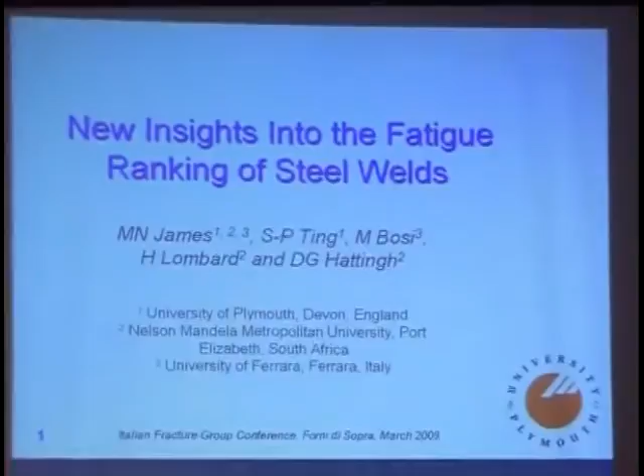It's trying to address a question I raised yesterday about structures, particularly steel structures. We have a lot of continuum mechanics solutions for predicting fatigue life, which all work to a greater or lesser extent. For some time it seemed to me one reason they don't work better, allowing us to use materials closer to their particular fatigue strength parameters, is that we don't really understand the material aspects influencing fatigue. Particularly in welds, you have microstructural and heat input influences leading to microhardness gradients and residual stress gradients. So I've had a go at characterizing the residual stress and microhardness gradients for a variety of welds, to see whether one might predict the fatigue ranking of welds from aspects of microhardness and residual strain.

It turns out that you probably can, but probably my data set is not big enough. One of the difficulties of advancing fatigue life prediction is that you require large matrices of experiments, which in this particular case, residual stress measurements, tends to be very expensive. And therefore we often don't get all the data we like.

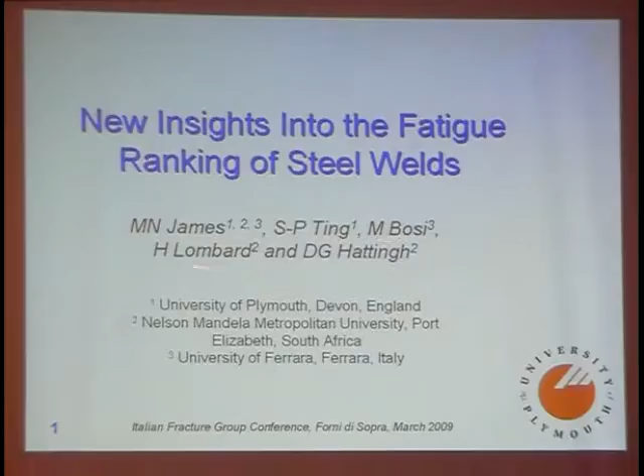My colleagues on this work, by the way, just to prove I do have an Italian connection, include Matteo Bosi, who very kindly is in the audience today and was an undergraduate student at the Università di Ferrara. You'll see that I am actually associated with Ferrara as well. Also a PhD student, Si-Pin Ting, and two colleagues in South Africa who assisted me with residual strain measurements.

So what have I done? We've had a look at parameters that might be used to predict the fatigue ranking of fusion welded high-strength steels. The background of this work was that Corus, the steel maker in the UK, now part of Tata Steel, had done some work on high-strength steels and found contradictory results for fatigue performance in terms of what they thought the residual stresses did.

They were interested in doing some residual stress measurements in these steels, so I came along and persuaded them to fund a PhD project. It turned out that the residual stress measurements they made using hole drilling and surface X-ray were not explaining the fatigue data at all.

So we're interested in understanding process property performance relationships. In welding, you've got process inputs, you use a filler metal, you use some heat, and you get a variety of induced properties. You have residual strain, dilution of the alloy in the fusion zone, a variable microstructure and a variable hardness. That makes it quite difficult to predict performance more precisely.

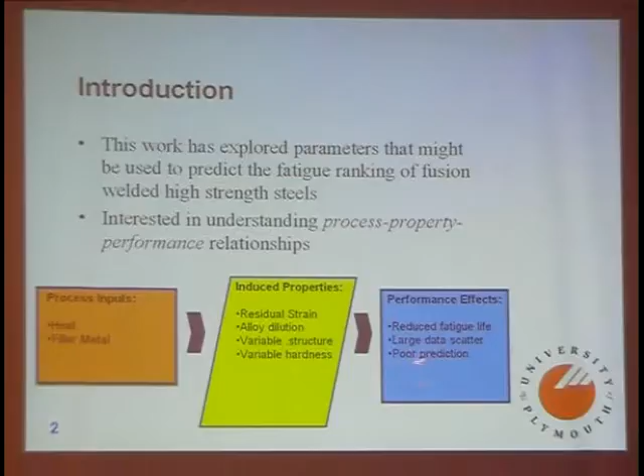What you tend to get is reduced fatigue life, large data scatter and poor predictive capability. So if we're going to advance that particular aspect, it means we do have to take some account of what welding is doing to the microstructure.

In principle, at a first order, if one understood what residual stresses and microstructural changes did to welds, you might be able to provide some advice to fabricators. This is quite useful advice if you can get around to it: should they make welds with undermatched, matched, or overmatched filler metal to get particular properties? Should they use higher heat input with fewer weld passes, or lower heat input with more weld passes? If you could even get that far, it would be quite beneficial.

Although this isn't taken account of in the fatigue design codes for welds, you often find there's a crossover in performance for two nominally similar welds. So it's worthwhile assessing life at shorter life, about 10 to the 5 cycles, and at lives longer than 2 by 10 to the 6.

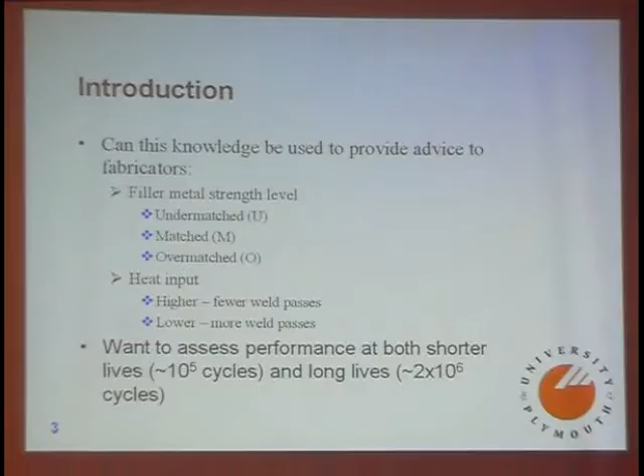You have another difficulty, of course, with longer lives in doing all the experiments needed to establish the long life region adequately. Everything has a cost, as Morris Sonsino noted yesterday, and these costs are just too high often for relatively small research projects.

This is a roller quenched and tempered steel, a high strength steel. It's called a 701 normally because it has about a 700 megapascal yield strength. Corus supplied plates 8mm and 12mm thick, and we welded together two plates a meter long by about 150mm wide using MIG welding. These plates have slightly different properties, but they are significantly higher in yield stress than the stated 700, up around 800 megapascal yield as manufactured. So these are actually high-strength steels.

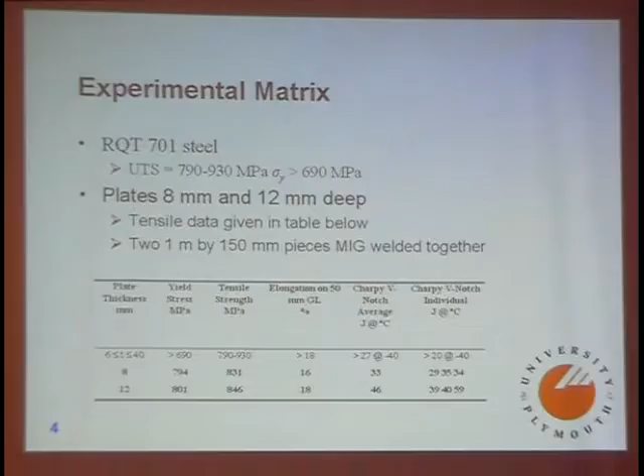We used 3 filler metals, nominally corresponding to overmatched, matched, and undermatched in the tensile properties of the actual filler metal themselves. You can see that the overmatched has a 980 yield stress as against the sort of 800 of the roller quenched and tempered steel. This is close at 700, and that is low at 500.

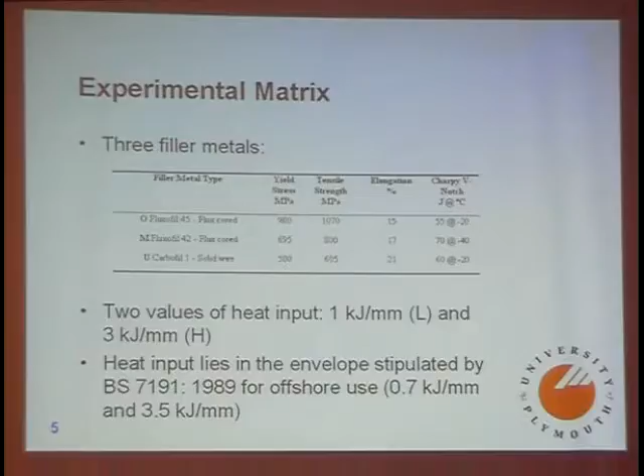We use 2 values of heat input, which lie within the envelope stipulated by a British standard for offshore use. So I've got a fairly broad experimental matrix to try, which should in principle give quite variable micro-hardness and residual strain, and does.

And so if you found a reasonable correlation across that broad range of data, you might think that you were on the right track. So when they made the welds, this is what they did.

This is 1 kilojoule per millimeter, 8mm plate, 3 passes. 1 kilojoule, 12mm plate, 7 passes. 3 kilojoules, 8mm plate, 2 passes, and in the 12mm plate, 3 passes. So we've got a matrix with 6 different weld conditions for each of the 2 thicknesses.

And as I say, that does tend to give you a good variation in hardness, residual strain, and fatigue performance. So if you can find some way of predicting the fatigue ranking, there is a sporting chance that you're getting something true.

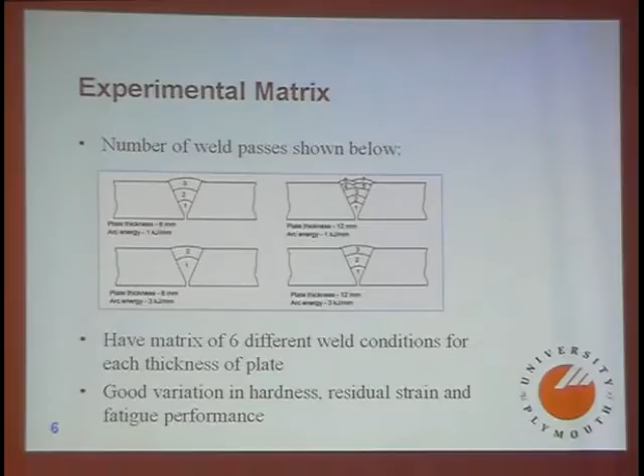So what do we do with all of this? I must say this project has taken me quite a long time to achieve. It's probably been going on for about 5 or 6 years as I steadily ironed out each of the wrinkles. In particular, the residual strain measurements are complex, expensive, and require you to put forward experiments to the Central European, well, the European facility.

You have to be careful when you say Central European. They are the Central European, but it's for the whole of the EU - central to the EU, not to Central Europe. So that is the ILL and ESRF in Grenoble.

I wanted to measure the residual strain profile transverse to the weld on lines 1mm below the toe and at mid-depth. 1mm below the toe is probably where you've got undercut intrusions and you would expect crack initiation to be occurring, or at least cracks to start growing. So that residual strain and the hardness there might indicate an effect on early crack growth.

The mid-depth one I'm sort of assuming dominates the longer crack lengths, and I was interested to see which one might work the best. So I measured residual strain along those lines and micro-hardness profile along the same lines.

I would have liked to have done a full 3D residual strain measurement and get the residual stress directly from that, but unfortunately that is just too expensive. You will not get the beam time at European facilities to do that.

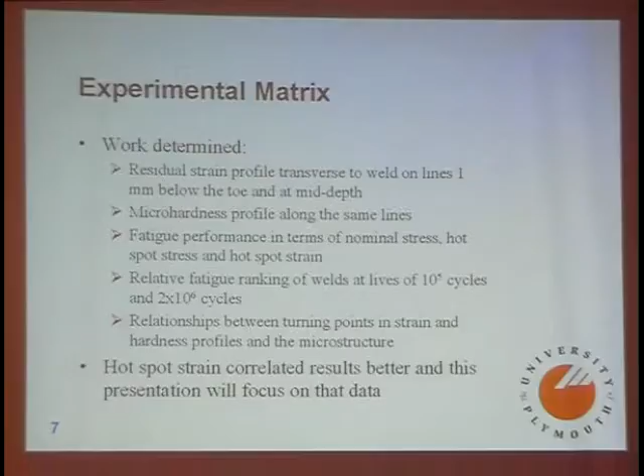So, summary of what I've said already. I'm interested to see whether some combination of residual strain and hardness information can predict the observed fatigue ranking, using things like turning point magnitudes, the range of strain and hardness excursions, gradients and their change across the weld toe, and the yield strength of the weld metal.

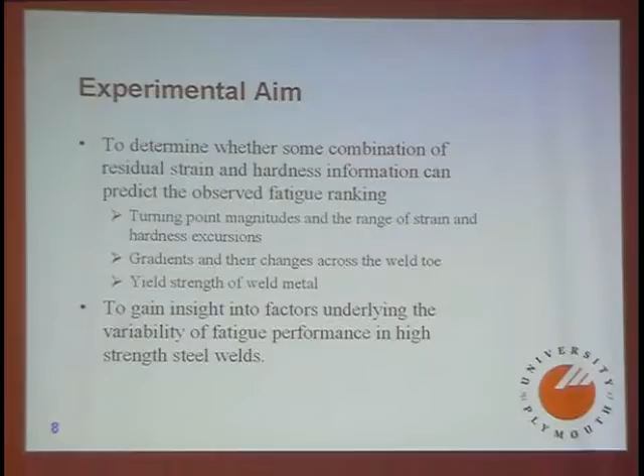But like many things in life, if you're in Korea or you're prepared to buy the equipment, you can get a map of yield strength across the weld matrix from micro hardness measurements, but sadly I don't have that, so we end up always doing a little bit of the whole story. And this is what I want to do. I would like to gain insight into factors underlying the variability of fatigue performance in high-strength steel welds.

One of the things that Corus had shown originally in previous work was that if you had the same welds fabricated by 2 or 3 people and then stress relieved as well, some of them, you ended up with completely different sets of fatigue data. And it got worse as the strength of steel went up. And so they said, we don't really know what this is.

We've done some residual stress measurements. They didn't explain this at all. They gave a counter result. And at this point I came along and said, in exchange for only a small sum of money, we can run a PhD project. This is it.

So we get these plates. These are 1 meter long by now 300 millimeters wide, and we cut them up. And again, there's always approximations to what you can do. You need a fairly big specimen to be reasonably certain that you've captured the residual strain field that is representative of the full-size plate. And so that is the residual strain specimen there. It would be nice to test fatigue specimens of the same width, but unfortunately the testing machine won't do that.

So then you figure that, well, if I keep these as 40 wide and don't change the length there, there's a sporting chance that the transverse residual strain in that direction is moderately untouched, and with any luck that will be the strain that will matter more to the weld rather than the sum of the principal strains, but you don't know the answer. So these are fatigue specimens, and that one there was used for microstructural analysis, as you might say.

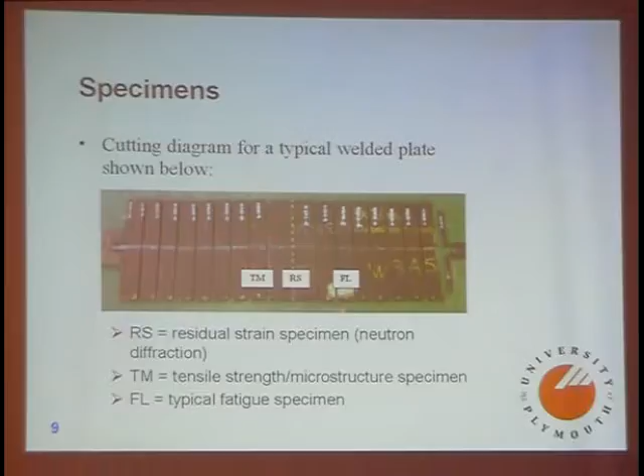So properties of interest are the hardness of the microstructure, yield strength of weld metal. They're both highly variable across the weld zone, and it's only possible with the equipment we've got to measure tensile data in the middle of the fusion zone, and you can do that with a 2.5 millimeter diameter waisted specimen. And then you can have a go at correlating the actual data with indicative filler metal properties. Just have a look at the accuracy of that tag of overmatched, matched, and undermatched filler metal. It turns out that that is not necessarily super close.

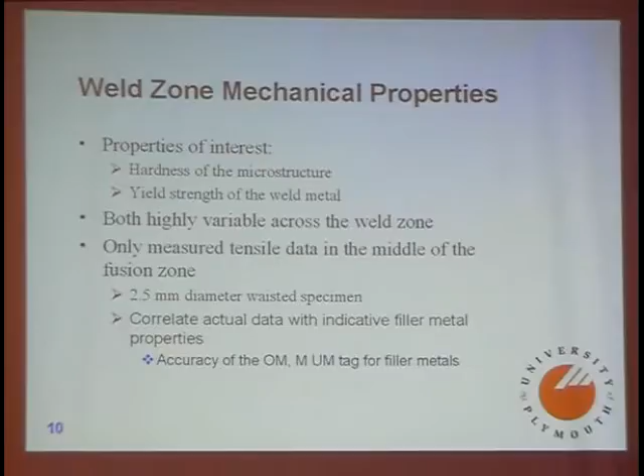So this table gives the tensile results. This is the weld process conditions, heat input, filler metal type, undermatched, matched, overmatched, plate thickness. We measured 0.1% proof strength and tensile strength.

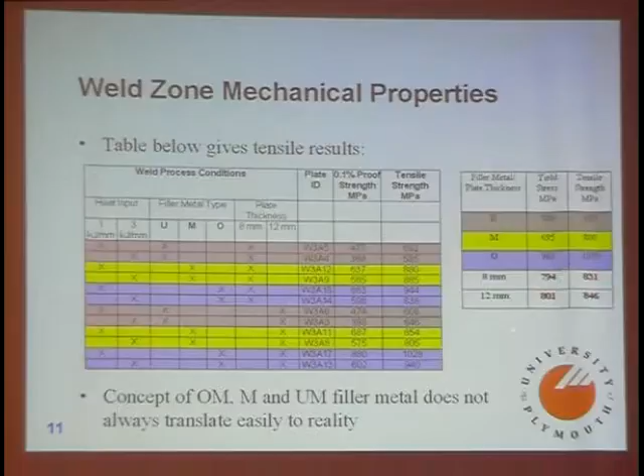This colour here, I'm not very good with colours, I'm afraid. I just choose them. I can't describe them. That colour there is undermatched, the yellow is matched, and what I think is blue is overmatched. And it shows you here the original strength of those filler metals, and there the strength of the plates. And you can then correlate those strengths with these values and those values.

So if you have a look at undermatched filler metal, you do a reasonably good job. So if you think you've made an undermatched weld, you have. Both the proof and tensile strengths are undermatched in all the cases we've looked at. If you look at matched filler metal, you get an undermatched proof strength in all cases, but more or less a matched tensile strength, about 5%. And so the concept of talking about welds as matched, undermatched, or overmatched is a little loose.

And if you use the overmatched filler metal, you get undermatched proof strength in certain cases, and those are overmatched 8 thick, low heat input, overmatched 8 thick, high heat input, that's the abbreviation system used. You get an overmatched proof strength in that one, and an, I guess random around in all the others, and an overmatched tensile strength except for that one, which is matched. So as you steadily increase the strength of filler metal, it becomes more difficult to actually predict what the weld property is going to be, at least in this high strength steel.

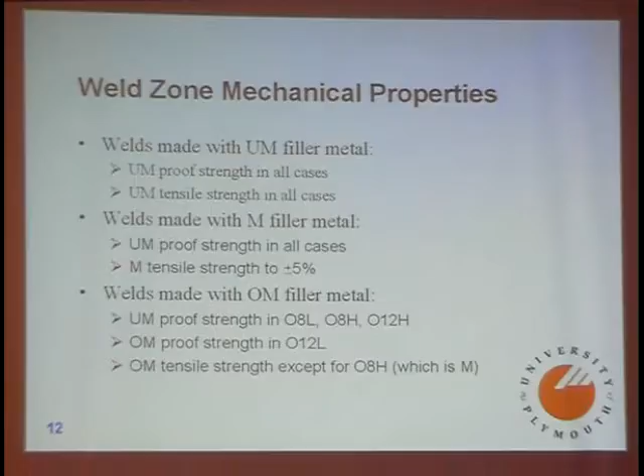Another set of generalizations you can draw out is that the lower heat input generally gives proof strength values close to the desired level. They're also invariably higher than the proof strength values obtained at 3 kilojoules, which is a reasonable conclusion. You would expect that. But the tensile strength is more variable. And there are certain cases where the higher heat input gives you a higher tensile strength than you get with 1 kilojoule per millimeter. And so the supposition is your data is influenced by fusion zone size, which is a function of heat input and plate thickness, dilution effects, and the number of runs, and it is going to be quite complex to actually predict what you do get, except the undermatch does seem to work fairly well.

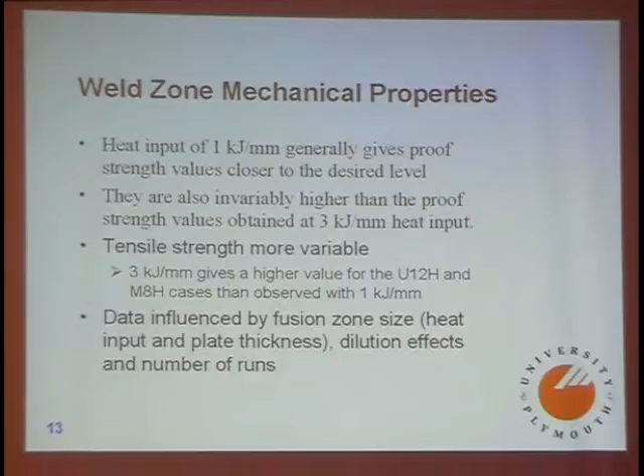My take on this work was that microhardness could be used to characterize the effect of heat input and heat flow on microstructure across the weld zone. We made automated microhardness measurements.

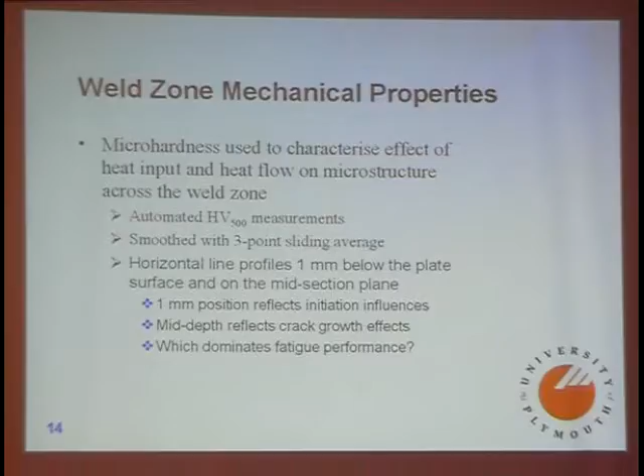We've smoothed the data and looked at lines 1 millimeter below the plate surface and on the midsection plane, on the assumption that those might be true, and I'm interested to know which dominates fatigue performance.

The sort of data you get out of this is this, and you can see that it is actually quite variable from weld to weld. This is undermatch 12 high, 1 millimeter depth, at the mid-profile - that white line tells you where the measurements have been made, and this is the profile along that line of hardness. So they are quite variable from weld to weld.

As I say, if you've got these sensors at all, at the end of the day you should be picking up something that is true. So you can say that you do get large gradients with the weld toe. My assumption in this work is that it is the gradients around the weld toe position, because that is where these cracks are going to start, that are the key defining influences on fatigue in some way.

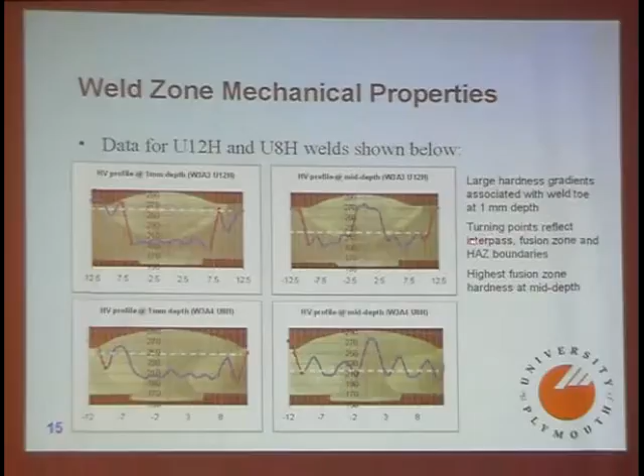This just shows you a different one. This is undermatched 8H, high input, again at 1 millimeter mid-depth. The turning points you can relate fairly well to interpass, fusion zone, and heat affected zone boundaries.

Just to indicate that there are substantial differences, this is typical data for a matched 8H, which is those two there, and an overmatched 8L, which is that data there. So there are big differences.

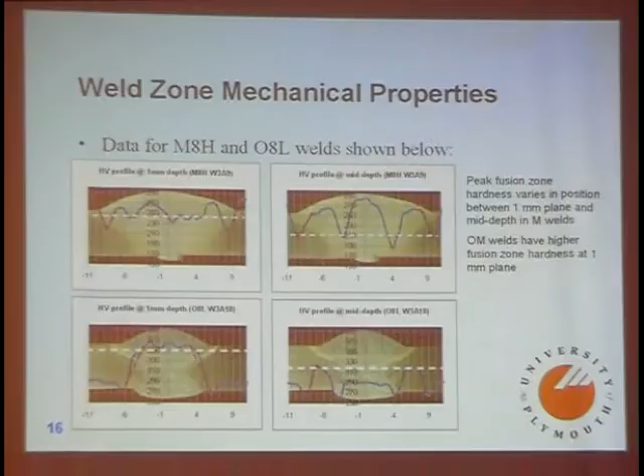So now I've got the microhardness data more or less sorted out. Now I need to get the residual strain data sorted out. We did neutron diffraction strain scanning on full width specimens containing 150 millimeters of weld run, on the assumption they should be representative, and we've measured transverse strains across the midpoint of the weld.

Again, we've measured along the same sorts of lines - obviously not to scale, but it's indicative. We've measured a matrix of points from minus 30 millimeters up to about plus 60.

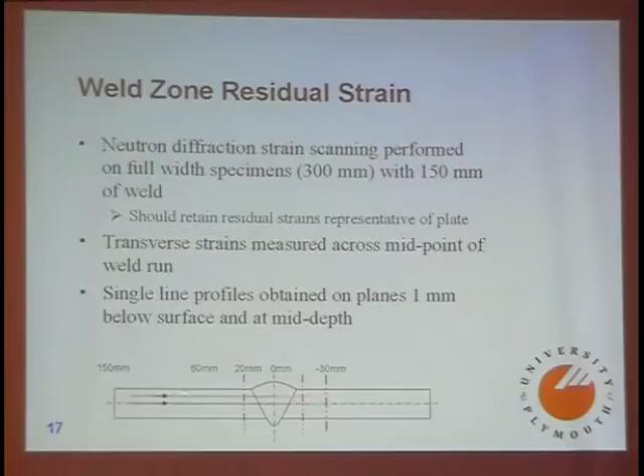We did that using the SALSA instrument at Grenoble, another fine alpine site. It's a vague, badly overexposed picture of the Alps in the background, close to the nuclear reactor. This is the hexapod table for the SALSA instrument with one of the weld plates in position, and you can measure the strains. The point is you can measure strains actually through 50 millimeters of steel.

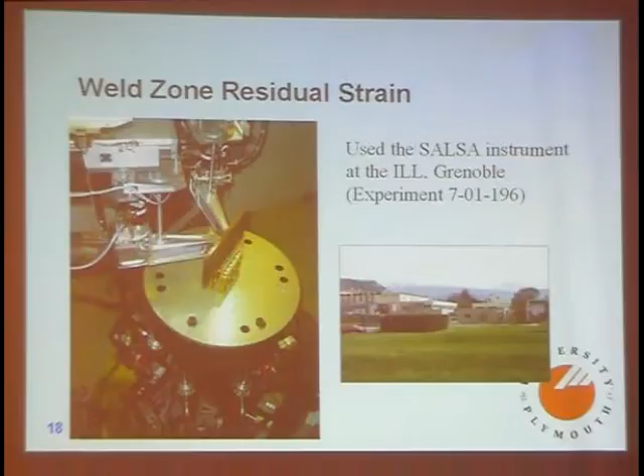We actually did a 50 millimeter thick chunk of steel for Corus, just to see how residual strains varied from 12 millimeter plate and 8 millimeter plate.

Now you have a problem when you make neutron diffraction residual strain measurements: you need to know the lattice spacing of the unstrained lattice. And that's not so simple to do.

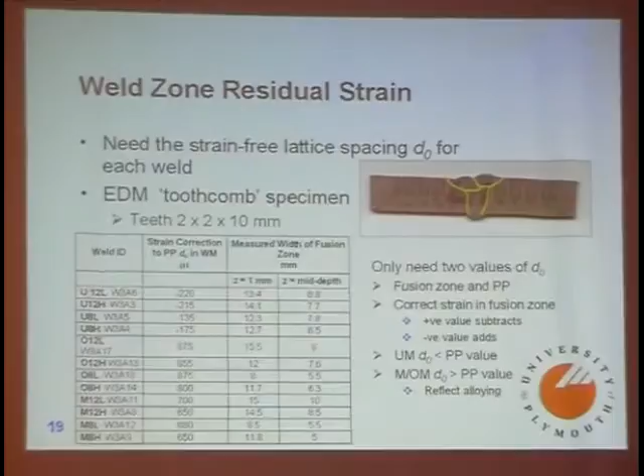But one way that sort of works is you can cut a little section off. This is a 2 millimeter thick slice across one of the welds. One thing to note here is these welds are made by Corus in the laboratory, and they actually have a very poor profile. But in fact this is quite indicative of reality - if you go and look at welded structures, you'll find the weld profiles are not super wonderful.

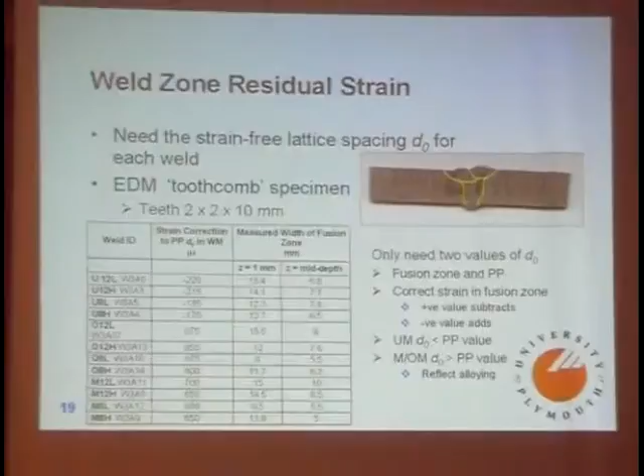This is sort of the point that Morris made yesterday in connection with adhesive joints - we tend to model perfection, and they tend to make rubbish. So the two things diverge, and that's another problem with predictive capability.

What we're interested in is we then can electro-discharge machine little teeth into it. The idea is that we've got a thin slice with separate teeth. If you measure along these teeth right at the end, in principle you should have a residual stress-free piece of material. We're trying to identify how the strain-free lattice spacing varies from the parent plate to the fusion zone, and these yellow lines roughly indicate the fusion zone on that specimen.

I had originally hoped that there wouldn't be too much variation in the D0, the strain-free lattice spacing in each weld. It turned out that was utterly untrue. As you can see here, these are the corrections to the parent plate D0 microstrain in the various weld conditions, and they range from a correction of plus 875 microstrain to minus 220 microstrain. So this becomes very important to take account of.

But the simple thing is you only need two values of D0. Sometimes you get a variation across the weld, but in steel it looked as though you get away with two values, one in the fusion zone, one in the parent plate.

So once you've got this, you can then correct the data. This, by the way, looks quite reasonable because the undermatched had different alloying elements. And when you looked at it, you'd have substitutional alloying here, and that should be a larger strain than it is.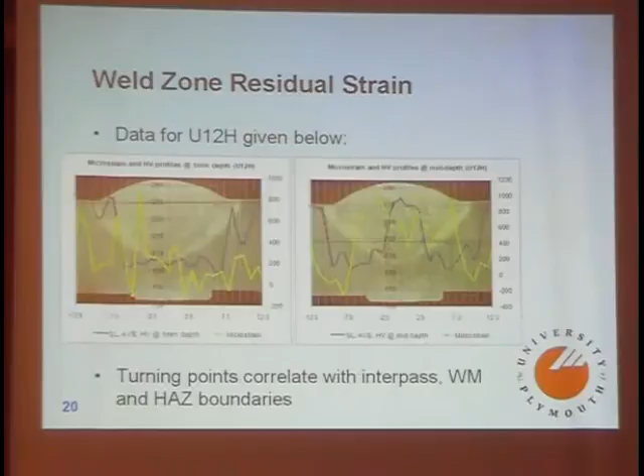As I say, you can see that the data do vary rather a lot from weld to weld.

So we've got the residual strain, we've got the micro hardness, now I need the fatigue line. I've used specimens 300 millimeters long, 40 mils wide on that assumption, 4-point bend, R = 0.2. I've measured hotspot strain by a series of strain gauges on the surface, and I'm happy to note that the sizes were about 0.5 millimeter. They correspond with what Morris said they should, so I'm reasonably sure it's okay.

We've obtained stabilized stress-strain hysteresis loops at each nominal stress value used in loading to get this. Now the thought that crossed my mind this morning, it would have been nice to have measured the residual strain on stabilized specimens, although when we've done work on what fatigue loading does to specimens, there is no plateau in the residual stress. It actually just keeps steadily decreasing as far as we can tell, as long as you're prepared to fatigue cycle with things, but you still end up with high levels of residual stress.

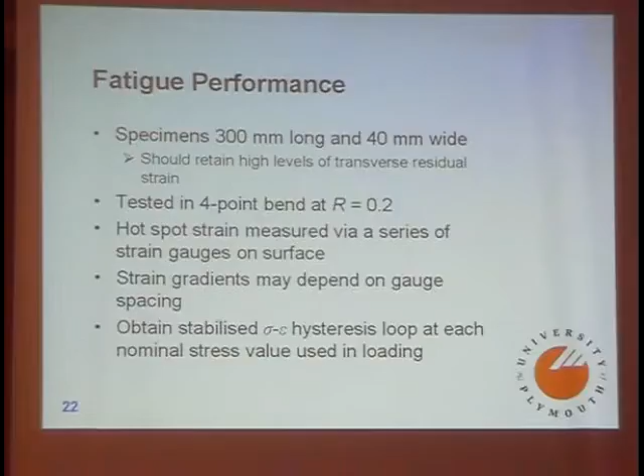But I would not have been able to test those plates. They're actually very deformed as welded. So you have a problem that you're going to load them unevenly, and therefore you're going to end up with residual stresses in the plate that represent the loading of fatigue you've done and not the original weld, I suspect. So I figured it was better to deal with the as-welded residual stresses rather than try and load a deformed plate that would do strange things to the stress field.

So this is how we've done the hotspot strain measurements. There's the strain gauge, there's the weld. This is the sort of data you can get. Again, we don't have enough points close to the weld to really extrapolate this terribly well, but we have done a little bit of FE work that indicates that it's at least reasonable.

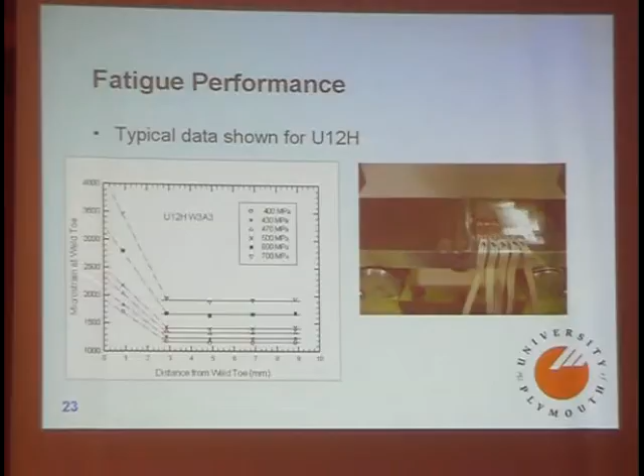And you can then get out the hotspot strain fatigue performance. These things get rather busy, so I split them out into undermatched, matched, and overmatched. But you can see there are a variety of different slopes here. So the data is quite scattered.

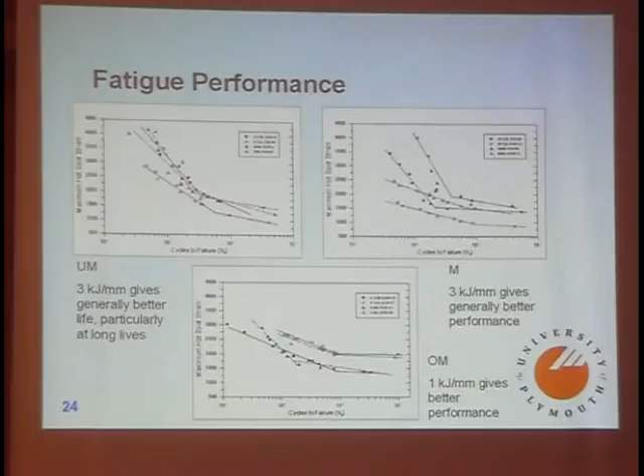And you can say that if you're using undermatched filler metal, 3 kilojoules per millimeter generally gives better life, particularly long lives. Again, high heat input better there, but interestingly with the overmatched, the low heat input gives better performance. So it's hard to draw generalized rules out of this.

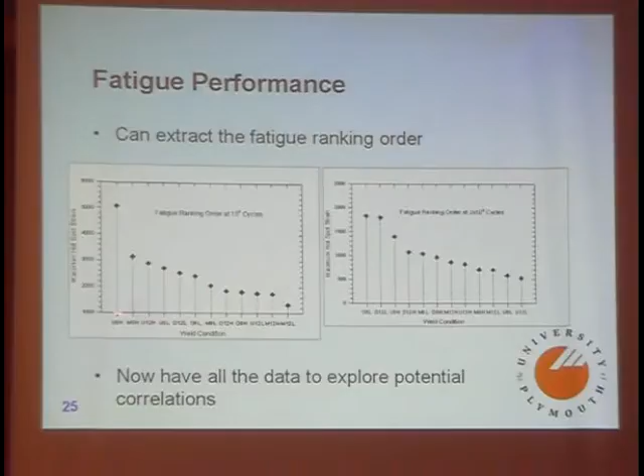But this is what I'm interested in. I'm interested in the fatigue ranking at 10 to the 5 cycles and 2 million cycles. And so I now have a ranking of the performance of these various welds. And it is different at those two lives.

And if you consider a single parameter like hardness gradient, you don't get terribly far. These are hardness gradients against weld conditions, and it's difficult to make sense of that. 12 millimeter plate and the low heat input give the 3 highest gradients at 1 millimeter, but the 3 highest mid-depth gradients come elsewhere.

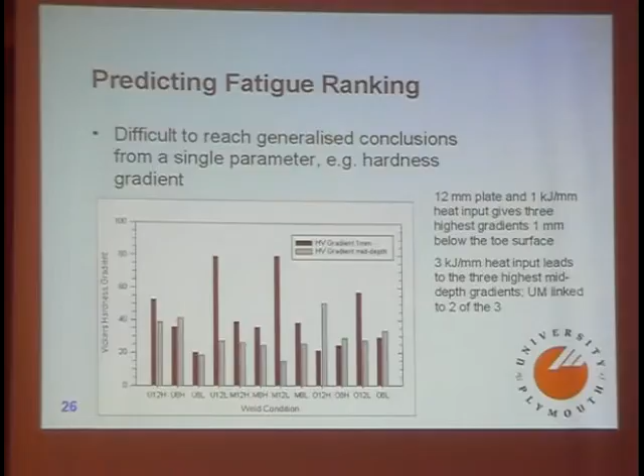So as I say, what we've looked at is a wide range of how best to describe this: changing gradient at the weld toe, range of hardness and strain at the weld toe, and gradients at the weld toe. What I'm presenting this morning to save time is just what worked best.

So for 10 to the 5 cycles, we were fairly successful in predicting the fatigue ranking of these welds, which I think is a very positive sign, I must be honest. For 2 million cycles, we weren't so successful, for reasons that I have insight into, I think.

So the most successful procedure takes the maximum range of weld toe residual strain at 1 millimeter depth, which is reasonable. You might expect that to affect crack initiation and early crack growth fairly well. You can use that as a discriminator of behavior into 3 categories.

So we've plotted here residual strain range at 1 millimeter against weld condition, in the same ranking order for 10 to the 5 that it should be. And you get a bunch of data up there, a bunch of data there, and some below.

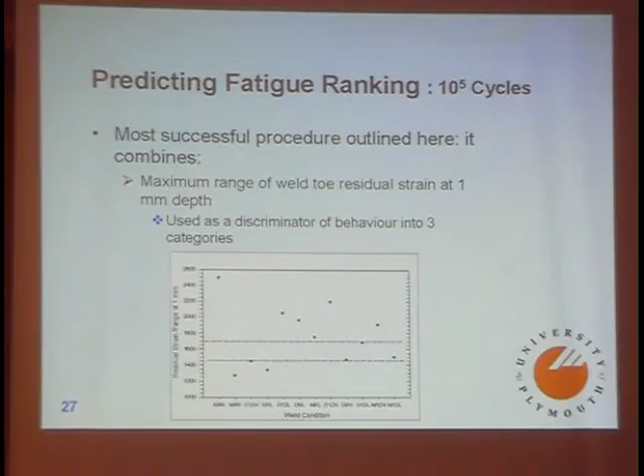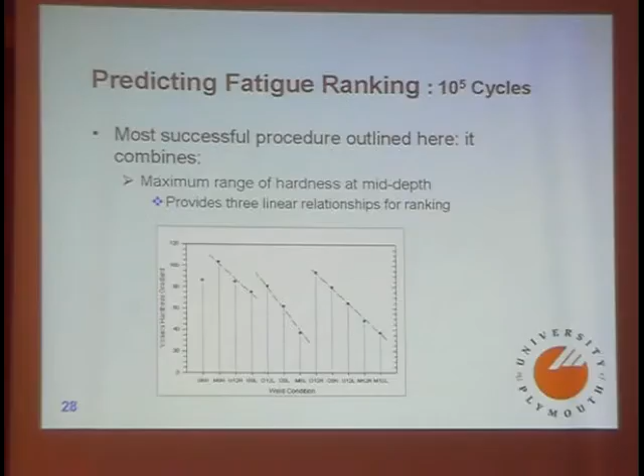And if you take those 3 data ranges, you can then plot them against maximum range of hardness at mid-depth, and you get 3 linear relationships, along with 1 or 2 outliers that we can't predict easily.

But you can then predict the ranking from strain and micro-hardness data for 10 out of the 12 welds at a life of 100,000 cycles. And you've seen how scattered this data is.

So my suspicion is that this is probably a reasonably fruitful way to try and understand how to take account of microstructural influences and residual stress influences that arise from welding.

So essentially you can then relate the hotspot strain to that. You can predict the hotspot strain from these relationships. But it doesn't work so well for the 2 welds at the extremes.

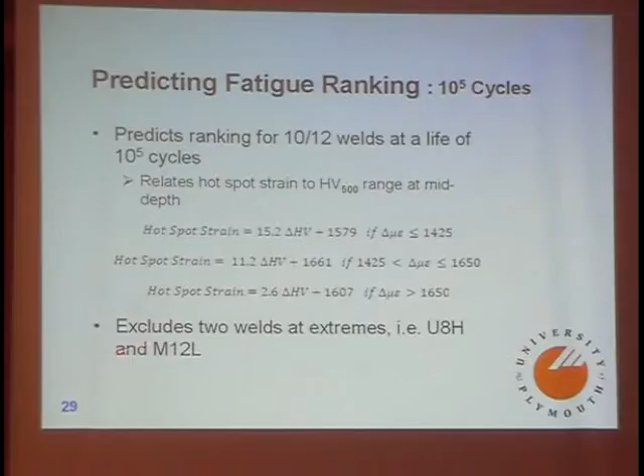And so that's sort of what you get. It's okay. I mean, you can fiddle this data 1,000 ways if you want to, but to get any sense at all out of this, I think, is positive.

So when you try and put a physical rationale for these relationships, you can't, with the data set we have, get a full rationale. But you can say it seems reasonable that the influence of the near toe residual strain on mean stress, and hence plastic deformation of the weld toe, is important.

But control of crack growth in this low life regime, where early crack growth is relatively limited as a percentage of fatigue life, could be by bulk hardness properties rather than near surface properties. And that's why you need the mid-depth hardness range as well.

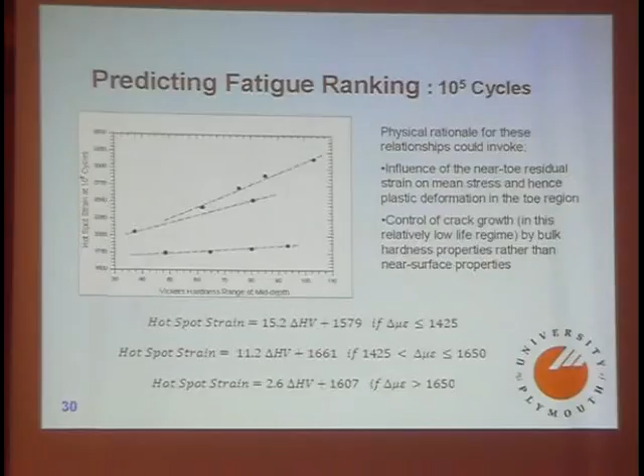But that, I think, is reasonably successful. When you come to 2 million cycles, it's less successful. You can get linear correlations in the data, e.g. hotspot strain versus weld tensile strength, which will give you these correlations for 12 out of 12 welds.

What we can't do is identify a second discriminating parameter that will allow us to predict which line the data should lie on. Now, it is possible that residual stress would work better than residual strain here, but that would require more measurements. But that's a quite likely supposition.

It is also possible that we would need more data in the long life regime to establish the slopes of those things better. Because below about 1 million cycles, I'm reasonably confident I've got the slope fairly accurately. In the long life regime, I'm less confident that we've got the slope of the fatigue performance accurately. There's not enough data in that.

So either the fatigue data is not accurate enough, or probably residual stress will work better. But we have half of the result. We can at least put all the data onto a series of straight lines, and we need another discriminating parameter to sort it out.

So, pretty much on time. My conclusions are that residual transverse strain and micro-hardness profiles, and you could say stress strain there instead of strain, can be used to predict the hotspot strain fatigue ranking for MIG welds made in this roller quench and temper 701 steel under different conditions.

As I say, we've used 2 thicknesses, 2 heat inputs, 3 filler metals, and we get the fatigue ranking for 10 out of 12 welds at 10 to the 5 cycles.

And while we're less successful at 2 million, we do get linear relationships, e.g. between hotspot strain and tensile strength. But I need a discriminator to work out between those.

But I believe that if we are going to get to what we want to do, which is not just have a continuum mechanics model, but have a continuum mechanics model underpinned by microstructural and fabrication information, then we need to somehow build these predictive relationships into our continuum mechanics models. And then in principle, we should be able to predict the life for a particular weld in a particular steel better. Thank you.